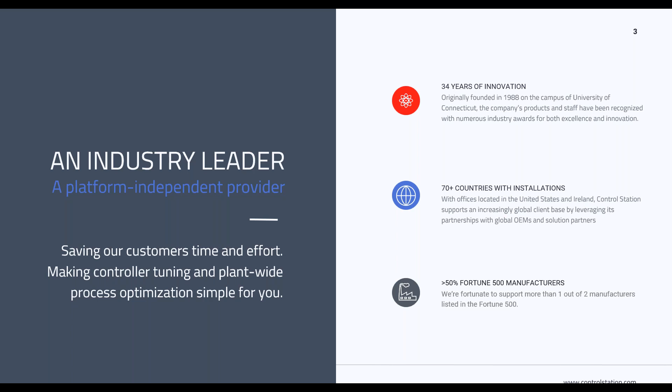So for those of you who are not familiar with Control Station, I just want to tell you a little bit about us. What we aim to do is partner with our customers to solve their process control needs with a combination of world-class software and expert services. We have offices in the United States as well as Ireland, and have successfully deployed our solution in support of facilities located in over 70 countries, and this is still growing. We are proud to partner with 1 out of 2 manufacturers listed on the Fortune 500.

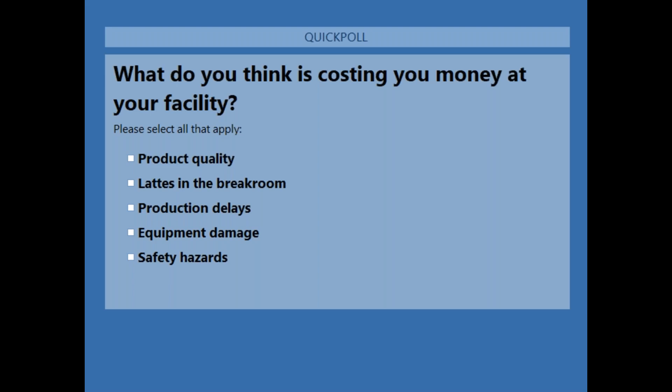All right, looks like we got a good polling here. I'm going to close this and share the results. Looks like the majority of people feel that in their facilities, equipment damage is costing them the most. Then it looks like product quality, safety hazards, and production delays. So thank you for participating in that.

So what I'd like to go through in this webinar is how oscillations are impacting your process, and to lay the groundwork for why we even care about oscillations. We need to understand how they actually impact our ability to optimize or run our operations at their most efficient, right? We've all walked into plants or walked into our own facilities and taken a look at loops or pieces of equipment, and we can visually inspect them and get an idea that, hey, they're cycling, they're oscillating, they're swinging around, and they've got problems.

And you walk over to the operator and you say, hey, look, you've got an oscillation over here. And their response, half the time is, yeah, it's always done that, don't worry about it, it's fine, right? And a lot of times you're kind of stuck, right? How do you take that fact that the loop is oscillating and actually go get them to fix it? Get either the maintenance staff to go and investigate the valve or the equipment or the instrumentation or the tuning or whatever it is that's causing that oscillation. How do you drive that conversation forward?

One of the things that we've done to help people understand that is explain: the oscillation itself may cost you some money, but what it's really doing is preventing your equipment, your process, your unit operations from running at their most efficient, right? In the example I give on the screen here, we start with the status quo, poor control, and then we can identify it, and then we go and correct it, right? We take that high variability and decrease it, we remove the cycling, the oscillations, through any manner of different things.

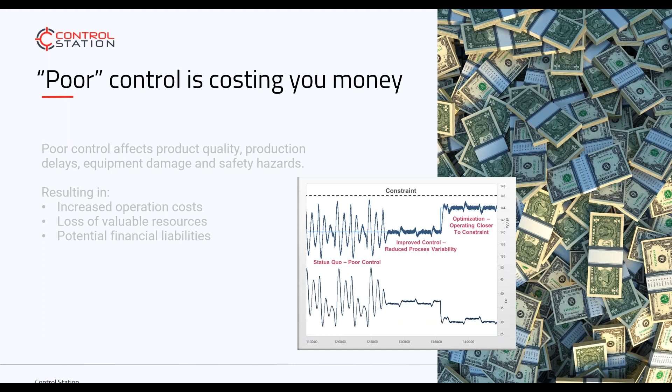When you're thinking about control loops and valves, flow loops really get the brunt of everything — what really causes your control loops, your valves and so forth to oscillate? There are a lot of factors that can cause valve oscillations and so forth. We're going to go through, after the next poll question, kind of in detail, these different areas and what it means, how you detect it, how you can interpret it, and what kind of improvements can you make there.

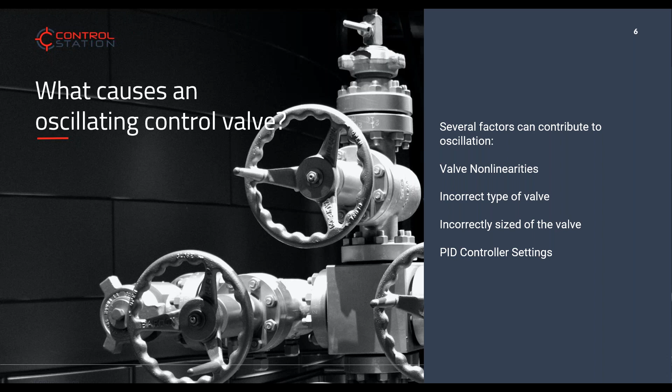We're going to talk about oscillations that are primarily due to valve nonlinearities or the wrong type of valve. If you have valve stiction or dead band associated with it, you have incorrectly sized equipment — do you have valves that are way too large or way too small? And how do the PID controller settings impact the performance of a loop, the stability of a loop? All these things can cause oscillations within the system, and we're going to talk about each one of those, but you have to be able to identify and detect these types of systems.

Which takes us into our next poll question.

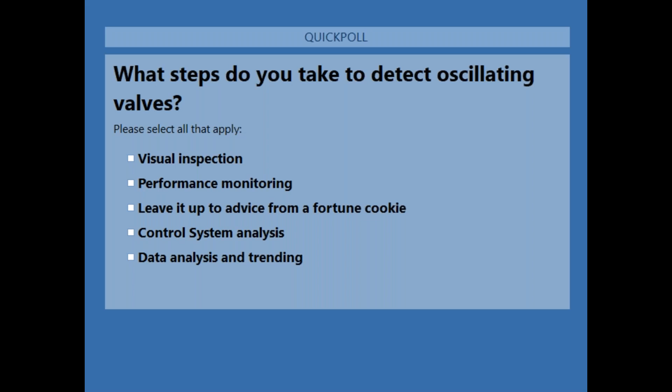So, 81% data analysis and trending, visual inspections, then performance monitoring. No one selected my fortune cookie — come on, I thought that was brilliant. Control system analysis, all right. Thanks again for participating, and I will hand this back over to Bob.

Even based off that poll question, I knew what the answer was going to be because it's the most common one. It's looking at data analysis and trending, identifying oscillations by looking at the process data, the trends of the system to see if there's oscillation in the process variable, the set points, the production rates, or whatever variables you're looking at on your HMIs and operator stations. You're seeing cycles in the data, and that tends to point you toward where the oscillations are impacting your system.

When you're taking a look at your process as a whole, there's also visual inspection of equipment. I've done enough plant tours where you're walking through doing inspection, and you can almost visually spot which valves aren't exhibiting the behavior they should, because you see the positioner bounce around or wobble, or you see steam leakage pushing out through the stem, and you can hear the valve move around a bit. That visual inspection can unveil a lot of poor behavior. Whenever you think there's a control valve issue, it's always good to do some sort of visual inspection.

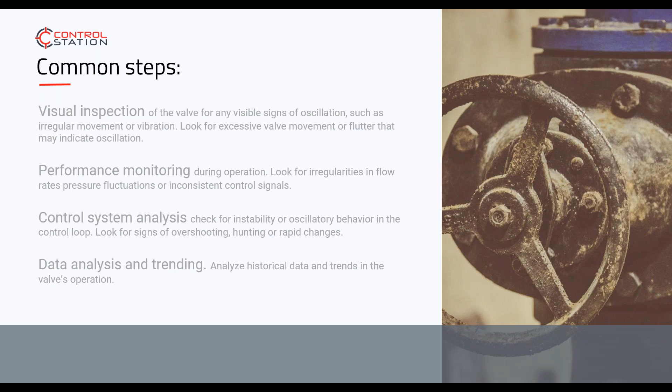Let's talk through some of the behaviors of your control loops, especially associated with valves, since they tend to be the root cause of a lot of cycles and oscillations within your system. Let's talk about some of the different behaviors that can crop up here.

So I'm going to bring in my colleague here and ask him a few questions. When you're dealing with valve stiction, how do you deal with that from a tuning standpoint? How do you fix a valve with PID settings?

First of all, good morning, everybody.

So you can't really fix stiction, unfortunately. The valve is what it is, the nature of reality is what it is. It would be nice if you could wave a magic wand and take care of it. You have this kind of dead area where the valve is — you need to ask and ask and ask before you get enough steam or head of pressure to jump the valve. But if you want to minimize the oscillation effect, where you're chopping back and forth, you can change the tunings, specifically the integral term.

There are ways you can identify the area of the rise versus the fall and things like that. What we do with our metric, without divulging too much since there's some secret sauce in there, is we'll presume that the valve does have stiction. We'll say, does it have 1%, or 0.5%, 1%, 2%, etc. stiction?

Then we'll look at the output and say, okay, if the valve had 1% stiction, what would the valve actually be doing? It wouldn't be moving exactly perfectly—it would be jumping behind this value. So then we'll say, okay, we've guessed that you have 1% stiction. That would mean the valve is doing this, not what the PID thinks it's doing. Which one of those two things is more likely to be explaining what we see in the process variable?

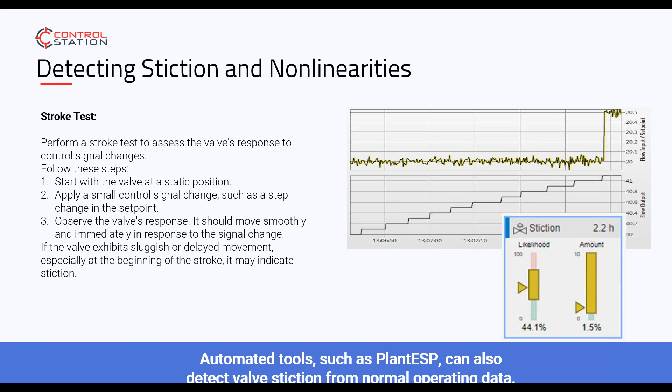Thanks, Brett. So now that we know there are different types of poor behavior that can impact performance, we actually have to look at the characteristics of the equipment itself. The type of valve matters—the type of control valve put into the system significantly impacts the controllability of that controller.

And sometimes that was not necessarily part of the original design. It could have been, well, the butterfly valve is the cheapest so we shoved it in there, or that's what we happened to have in the stock area at the time and swapped it out. Or worse, it had a nice globe valve in, and we swapped it for a butterfly valve because that's all we had during turnaround and available to us. The dynamics of those valves can significantly impact the performance of the system—they change their linearity, which is how that control valve moves the flow.

So if you move the control valve 20%, 20%, 20%, how much does it move the flow each time? You can get an idea of the linearity, representative of different types of systems, whether it's linear globe, ball, or butterfly.

Just because the linear globe looks perfectly linear, you might think we should put that everywhere. Well, that depends on the installed characteristics. If you've got a pressure drop when you start opening the control valve, the linear globe becomes nonlinear, and something like an equal percentage globe would actually account for that pressure drop. So it's not just a trivial selection process of the type of control valve.

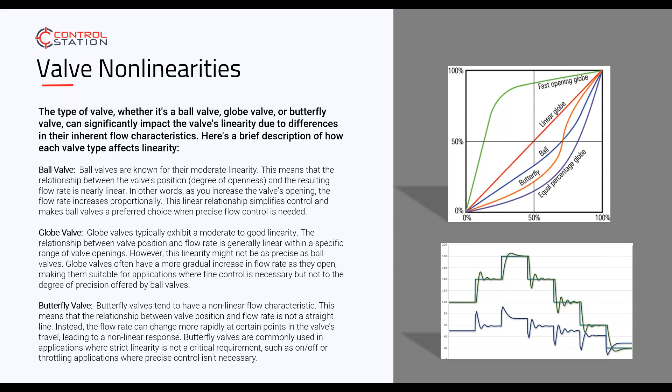Excellent. Now that we know we have these types of systems, we have to be able to go and deal with the installed characteristics. As Brett mentioned, different valves may have different characteristics, and when you install them, it can be a little bit different. So how do you test it?

So Brett, what are some of the approaches or data analysis that somebody can do without knowing the actual valve type that's out on the floor, just by looking at process data? What could they do to infer that nonlinearity or detect it? It's uncanny, Bob - you have the slide right here that shows it.

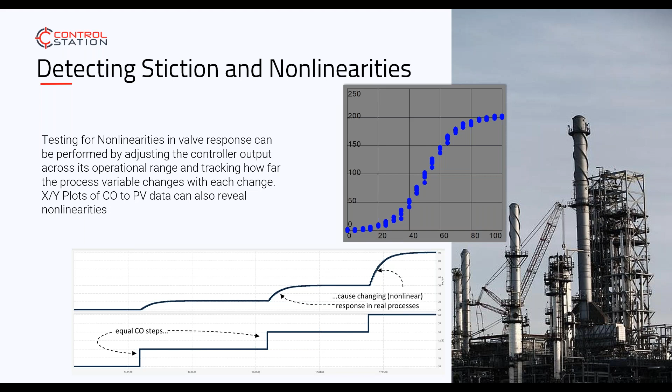In the perfect world, it's a nice, beautiful X equals Y line down the middle, but we're never in that world, unfortunately. So now that we understand where the nonlinearities and poor behavior come from, how do we actually detect stiction or detect oscillations and cycling within the system? There's a whole lot of material to jam into 2 slides here, so we'll do our best.

Oscillation detection really has its roots around spectral Fourier transform analysis, where we can take a signal and break it into its frequencies to try to understand what's going on within a particular signal. Brett, can you do an elevator pitch for what power spectrum is?

How long is our elevator? Let's just say it's Nakatomi Plaza, right? Okay, I'm joking. Couple minutes.

So, easy peasy. The way I like to explain frequency analysis is that if in your mind's eye you imagine adding together a fast and a slow sine wave, one that's oscillating once a minute and one oscillating 4 times a minute, if you add those together, you're going to oscillate up a little bit, then down a little bit, up and down. What you can do is that backwards: take any signal and break it down into its component frequencies. You can say this signal, if it was made up entirely of sine waves, would be a lot of this kind, a little bit of this kind, not too many. The amplitude would be pretty small at this frequency, but you can build up a frequency fingerprint for what the data signal is.

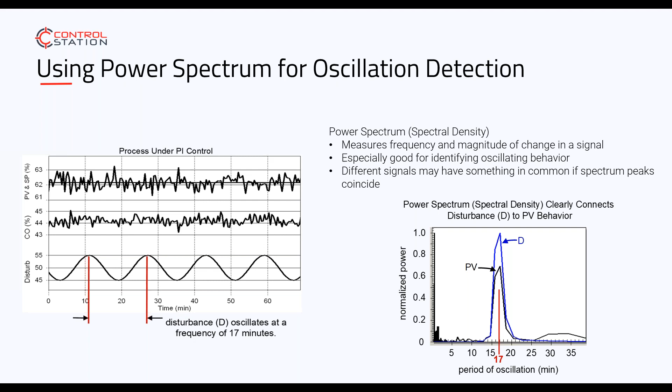When you take Brett's comment that if you've got one or two loops, interaction analysis isn't as important as when you have 100 or 1,000 loops and you're trying to go through all your trends. The comment on the poll earlier was, we just use data analysis and trending, so your oscillation detection is visual in nature - you pull up a trend, then start stacking those trends on top of each other and stare at them until you see those patterns and oscillations. Then you try to visually line up the periods, trying to determine if that's a 50-minute, 40-minute, or 20-minute oscillation.

When you take power spectrum and break it into the raw data we saw in the last trend, you can transform it and look at it in a different way. So Brett, can you walk us through the idea of analyzing multiple loops together for identifying that shared period and explain the trend and the analysis method here?

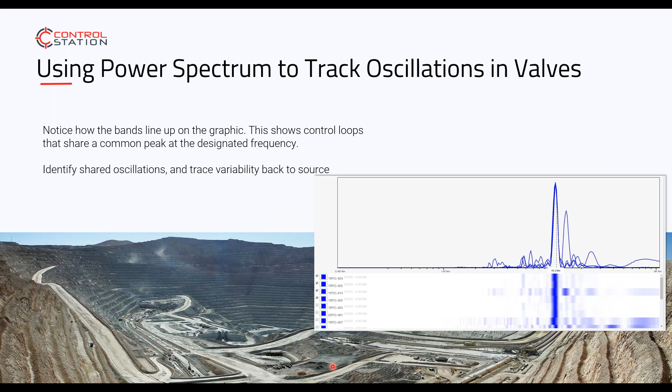As Brett mentioned, it's kind of related to that - it's the fingerprint. These are the frequencies that make up that signal, and if they've got shared frequencies, that's a good way of determining what frequencies are within the data and which ones are shared between your different loops. So if you're trying to do root cause analysis or frequency detection, these are the set of tools you would use. Power spectrum Fourier transforms are the heart of it.

So now that we have this knowledge of oscillating processes, we need to be able to take these loops and apply tuning to them to sometimes correct them.

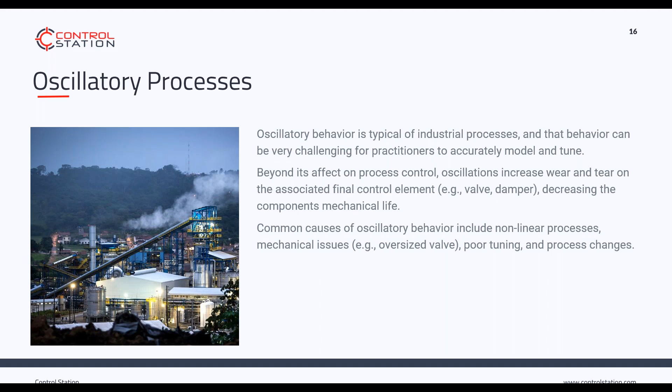Tuning is not going to fix a sticky valve or a broken valve, but we do need to be able to approach controllers that do have friction present. So if we're dealing with non-steady state or oscillatory and moving data, you need to make sure your software is equipped to handle those types of systems.

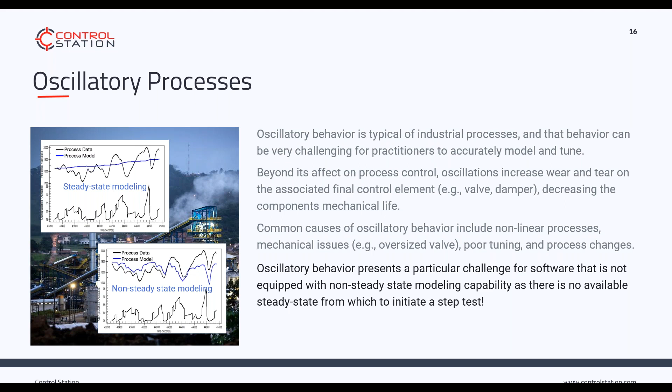If all your processes were very simple flow loops that never move, stay at set point, and set point changes look like they come out of a textbook, that's pretty simple. Unfortunately, the real world's never that straightforward. We're dealing with processes that are oscillating and swinging. So being able to deal with non-steady state or oscillatory data is a real benefit when doing PID tuning analysis.

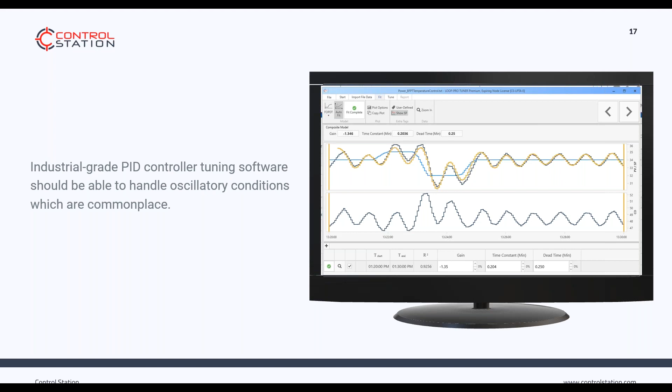We're going to spend just a couple of slides talking about how PID controllers can impact the oscillatory nature of a loop by adjusting the tuning parameters. We've only got a couple of minutes here, and this is normally about 6 hours of material, so we're gonna move pretty quick. But within our tool set, you can analyze oscillatory data to generate tunings.

What impact does tuning have on performance? One of the tuning parameters that is probably most influential is the integral term. Brett, can you talk about how integral action increases oscillatory nature and what they would need to do to mitigate oscillations with integral action?

Okay, so like you said, it's like a 6-hour thing, but ultimately the I term, the integral term, is going to be adjusting your baseline underneath the controller output of the process. It's searching for the right value of the output that will get you to whatever new set point you have. Because of its summing nature, it isn't making really sharp changes, it's making more rolling, summing changes.

That's fine if you have a situation like the bottom middle, that's working pretty well. But what winds up happening is that as you start pushing too hard on this oscillation, this summing takes the previous sum too seriously and overshoots, then it has to come back around and keep working. The integral term is invaluable and necessary in 99% of industrial processes, but taken to extremes, because of its underlying summing, rolling nature, it can lead to intense oscillations.

To mitigate it, you have really two possibilities: you can use less, or you can apply a little bit of derivative. So I think that's the next slide, right? Yeah, look at that. It's almost as though we planned it.

So basically, on the left you'll see a PI controller. And if we wanted to push that any harder, the oscillations would be unacceptable. If we push the P and I terms harder, we'd get a nice faster startup at the beginning, but the resulting oscillations would make it not worth it.

What derivative does, and we won't get into how, is it dampens oscillations. So derivative lets you push harder with the P and the I while also dampening the oscillations that might come from that. You still get some overshoot, but it's significantly less oscillatory. As a result, we get to set point maybe 20% quicker on average. That's a benefit if that 20% is important.

If this is a flow loop and you just went from 5 seconds to 4 seconds, probably not worth it. But if it's an oven and you went from 5 hours to 4 hours, definitely worth it. For the flow loop, I would just recommend the other solution, using less integral.

Also, noise is a large problem with derivative because it's generating a slope from point to point. When calculating its derivative, a chattery, noisy signal will lead to increased chatter in the output. As a result, you tend to only use derivative on smooth loops like temperature. The way I like to think about derivative is it tends to fight that kind of inertia of temperature loops.

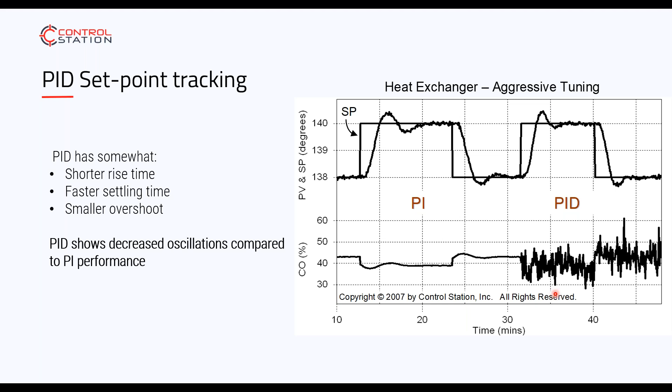And even if you have a clean signal, just throwing more and more derivative at it isn't the solution. It's not like, oh, I got an oscillation, I'm just going to keep throwing derivative at it till it goes away. Too much derivative will really start to inhibit the ability for the controller to respond well to the process.

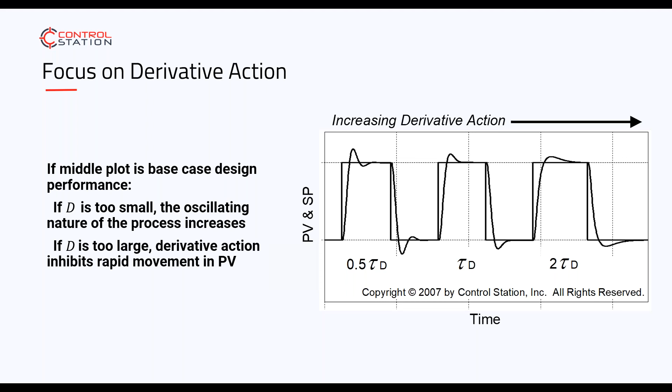And you end up stretching the oscillation out, not getting rid of it. So derivative is one of those things that has a limited application, probably 5 to 10% of loops. Slow loops, temperature controllers tend to be the most common application, clean signals, and generally you just need a little bit. You don't need a lot of derivative to get the benefit you need. Any more actually ends up causing more problems.

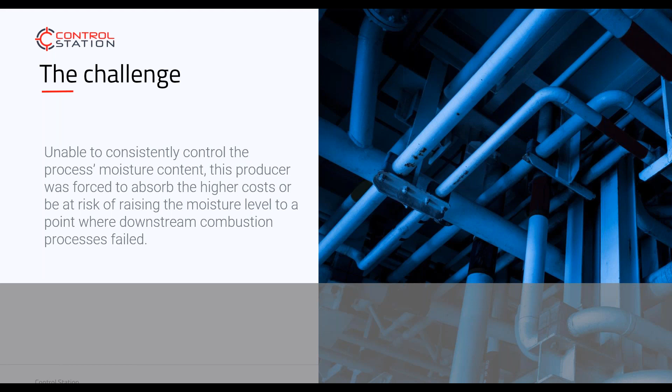So just to wrap up on the topics, I know we've blown through a lot of material in a short period of time. We can talk through a quick case study. This was a gas preheater on a particular system that had a lot of oscillation and variability, and being unable to maintain this process at a constant target caused variability in the moisture content of some downstream units and different processes, and it caused issues with the system. So we were able to take the data from this application, generate models, generate tunings.

To get to the point where we could take the variability of the loop and decrease it dramatically. Decreasing variability, as we learned, allows us to do that optimization, be able to move set points a little bit up and down. And if you were to take this process and move its target up or down based off of the variability improvements you've had, you'll probably gain just 1 or 2% movement, less or more valve position, depending on which way you're moving, and be able to maybe use a little less utilities in the system in the long run.

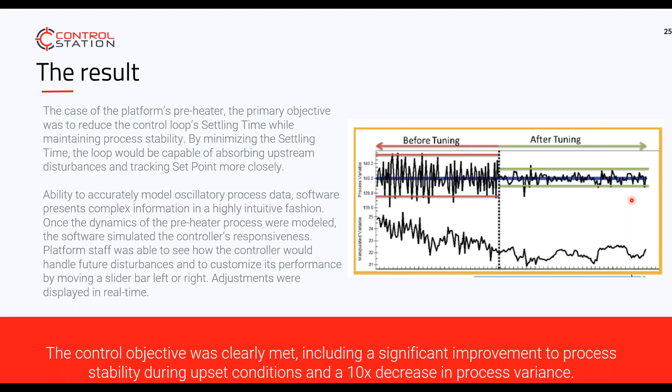So tuning, identifying the oscillations, identifying the types of valves, identifying the source of the nonlinearities, fixing valves when necessary, tuning when required, helps you get to that variability improvement that you can see.

Brett, I think you probably have a comment on this as well. Yeah, so the other thing I will mention, just so we're clear, is that you only ever need to use derivative if you're trying to push things to the max. If you only want a smooth, moderate response, you can get that by backing off the P term and the I term. It's only when you want to push your loop as fast as it can go and those resulting oscillations become a problem that you need derivative. So for these slow moving pressures that you're talking about, it's unlikely that you're going to want to take a huge pressure vessel to the max. It's very unlikely that you're going to be pushing that super hard.

The pressure loops you're moving quickly are probably going to be small, noisy, and quick, so at that point noise might be an issue. It's a razor's edge you're balancing on with pressure. Derivative is all about looking at that rate of change. So if you have a relatively smooth pressure at a constant set point and it starts to spike, and you want your controller to react as fast as possible, derivative will help you. But if those spikes are noise, it's going to make things worse. It depends on the objective and nature of the pressure loop you're trying to control, and whether you're trying to get the thing as fast as possible. I've used derivative on flare pressure once or twice with great success, but I've probably removed it from more pressure loops than I've added it.

Okay, thank you for that great explanation. Can you go to the next slide, please? Excuse me. Next slide, please. Yeah, it's stuck. Oh, it's stuck. Okay, there we go. All right, thanks, Rob. We're live, people—sometimes it just happens that way.